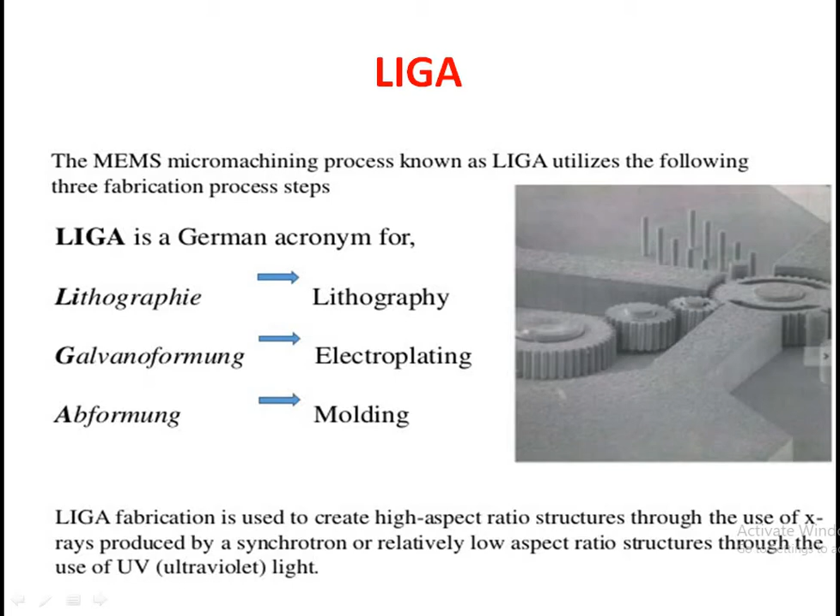So LIGA, once again, stands for the German acronym for lithography, galvanoforming, and abformung: lithography, electroplating, and molding. Now how does this LIGA process take place? These are the following steps for the LIGA process.

First of all, a very thick resist layer, up to hundreds of microns, of polymethyl methacrylate (PMMA) is deposited on the primary substrate. The substrate is the primary one on which this PMMA resist layer is deposited.

This PMMA layer is exposed to collimated X-rays, and then it is developed. Metal is electro-deposited on the primary substrate, and then the PMMA is removed or stripped out, resulting in a freestanding metal structure. Then plastic injection molding takes place.

This is how this process goes on: first, deposition of the PMMA resist layer on the primary substrate; then the PMMA is exposed to collimated X-rays and developed; then electroforming is done, where metal is electro-deposited onto the primary substrate; then the PMMA is removed, resulting in a freestanding metal structure; and finally, plastic injection molding takes place.

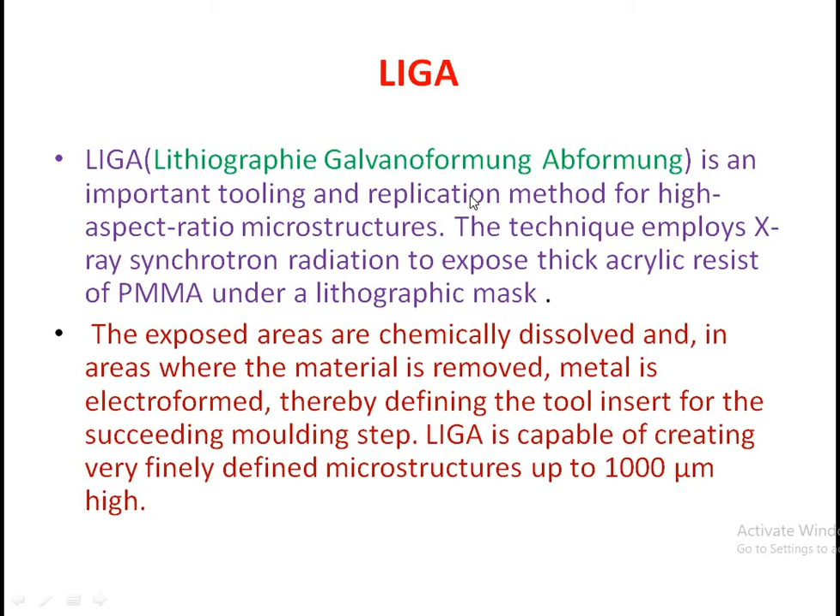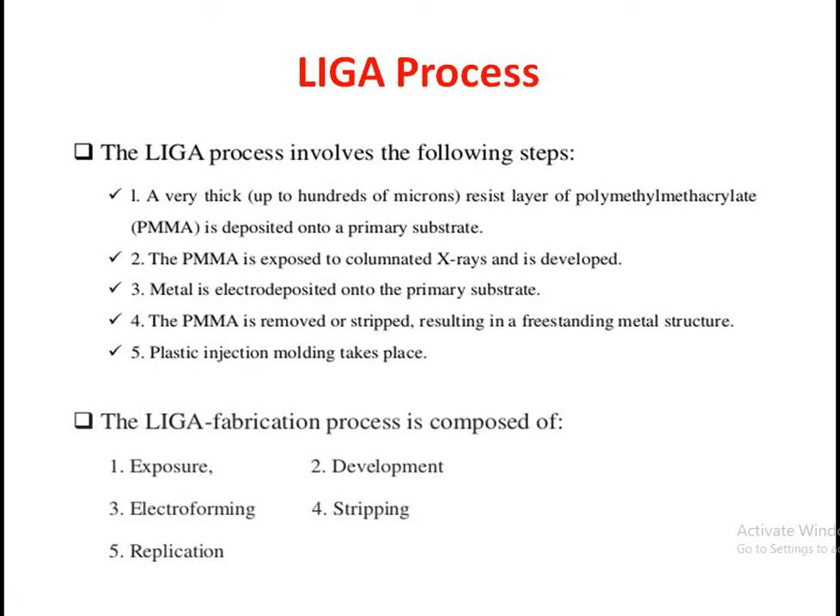This LIGA fabrication process is composed of the following steps: first is exposure, second is development, third is electroforming, fourth is stripping, and fifth is replication. That's why it is called an important tooling and replication method: exposure, development, electroforming, stripping and replication. This is how the LIGA fabrication process goes on.

Now in this first step, you can see the substrate on which PMMA is deposited. The thick photoresist, that is PMMA, of 300 to 500 microns, is coated on a substrate with an electrically conductive surface. Now the second step involves X-ray radiation.

X-ray lithography uses extended exposure from highly collimated X-radiation to penetrate thick resist with well-defined sidewalls. The X-rays have to penetrate through this thick layer of PMMA. This irradiation involves exposing a thick layer of resist to a high energy beam of X-rays from a synchrotron. The mask membrane is normally a low atomic number material such as diamond or beryllium, or thin membranes of a higher atomic number material such as silicon or silicon carbide.

That is the mask, which has either a low atomic number or a high atomic number. Low atomic number such as diamond or beryllium, or higher atomic number such as silicon or silicon carbide.

The first step is coating of the substrate with a thick layer of PMMA material, which is called photoresist. The second step is exposing that PMMA to X-ray lithography to penetrate through with well-defined sidewalls.

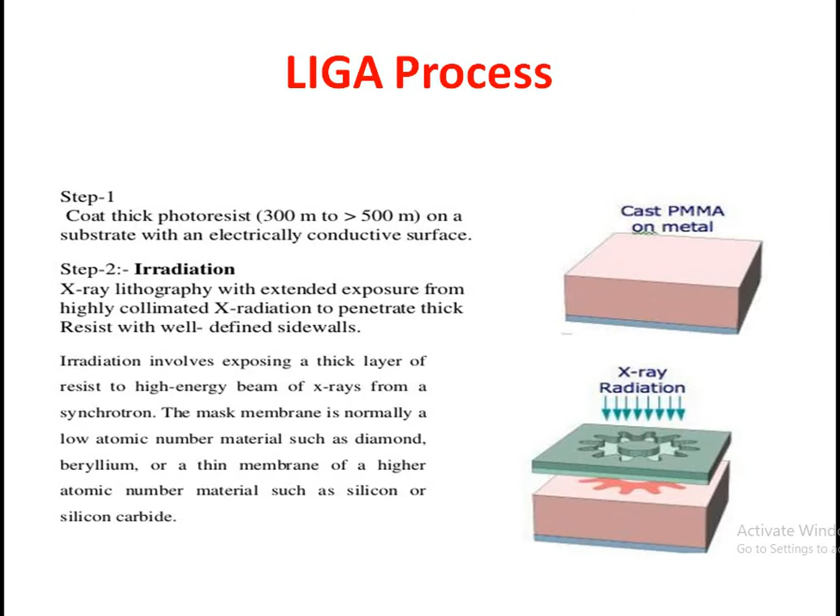The third step is the development. In this step, the pattern is etched into the resist substrate by the use of X-rays and the desired structure is formed. This is how development is done. Next is the electroforming.

Electroforming is same as electroplating, so metal is electroplated on the exposed conductive substrate surface. Electroforming means the plating is used to create an actual metal component. That's why the next step is electroplating.

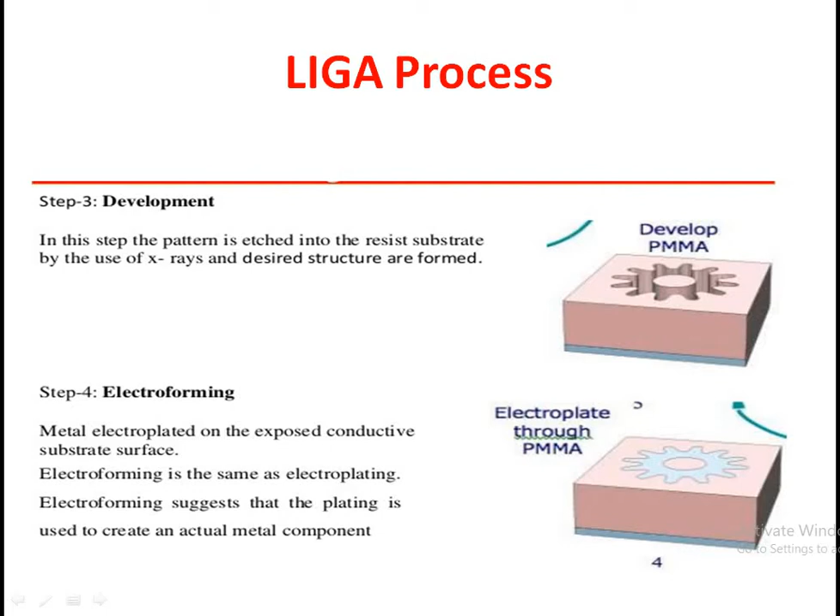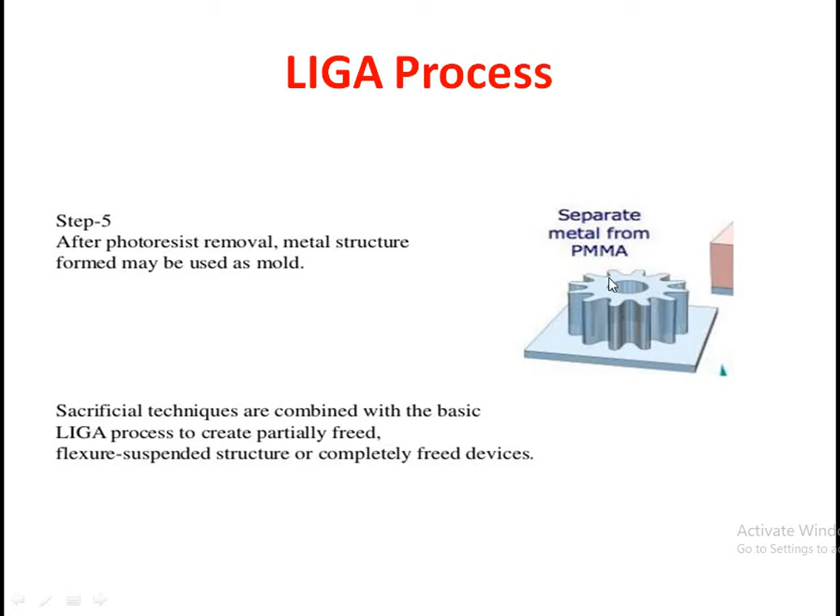The third one is development, meaning the formation of the desired structure, and electroforming is the plating used to create an actual metal component. The next step is, after photoresist removal, the metal structure formed may be used as a mold for making different jobs by separating the metal. This is how it is prepared using the LIGA process.

Now once again we will see this in tandem. First is the substrate, then the PMMA which is exposed to X-ray radiation. After that there is development, then electroplating, and this is separated from the PMMA. So this is the final product.

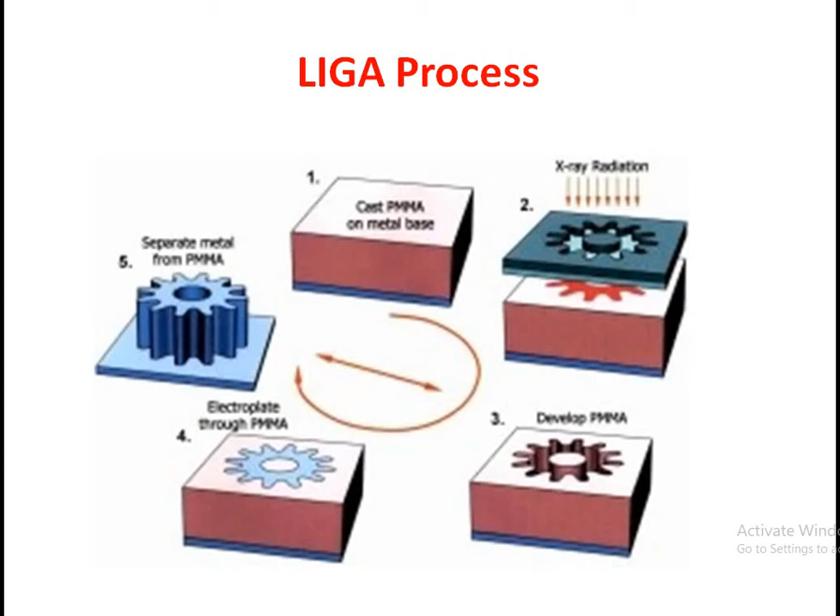Now, what are the components of the LIGA process? First, masks. Masks are composed of a transparent low atomic number carrier, a patterned high atomic number absorber, and a metallic ring for alignment and heat removal.

These carriers are fabricated from materials with high thermal conductivity to reduce the thermal gradient, for example vitreous carbon and graphite, silicon nitride, and titanium.

The mask can either be created by electron beam lithography, which you have already studied in rapid prototyping, or by a plated photomask. The third type is the direct photomask, which provides 80 micrometer thickness.

Substrate: as we have seen earlier, the starting material is a flat substrate, such as silicon wafer or a polished disc of beryllium, copper, titanium, and other materials. The substrate is electrically conductive.

And the photoresist: for fabrication of high aspect ratio structures, photoresist is a must. It forms a mold with vertical sidewalls and must be free from stress. The use of photoresist depends on the type of LIGA process used.

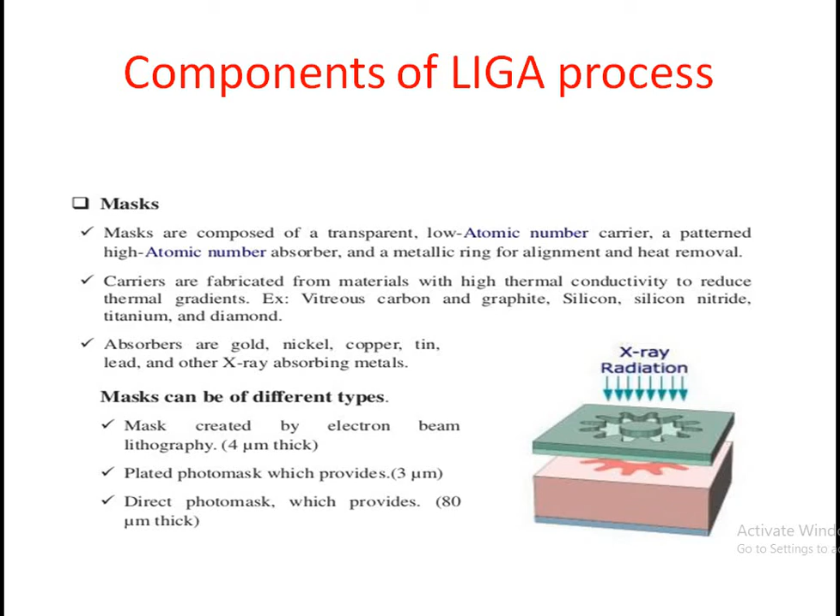First is the mask, which is transparent. Masks can be of different types, made either by electron beam, plated photomask, or direct photomask. Substrate is a flat substrate such as silicon wafer or other materials, and it should be electrically conductive. Then photoresist, for fabrication of high aspect ratio structures, is a must.

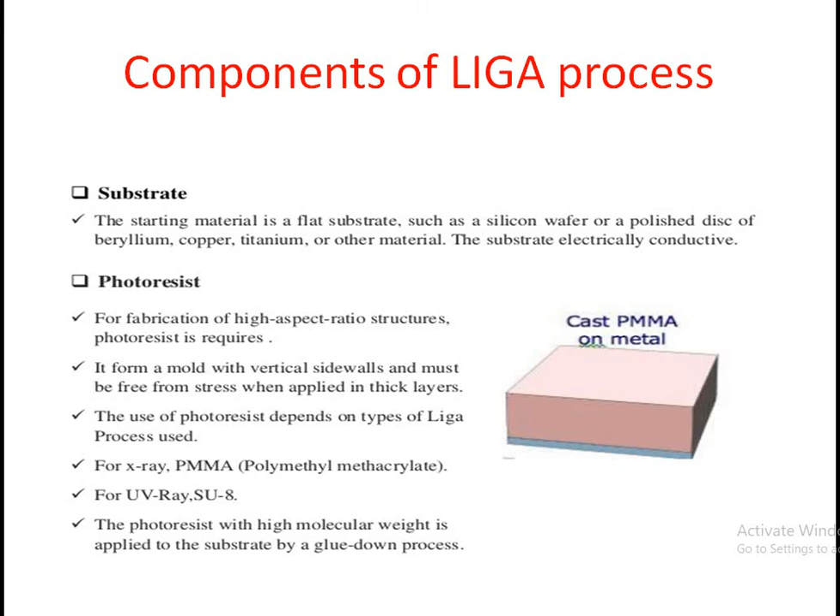For X-rays, you can go for PMMA. For UV, ultraviolet, you can go for SU8.

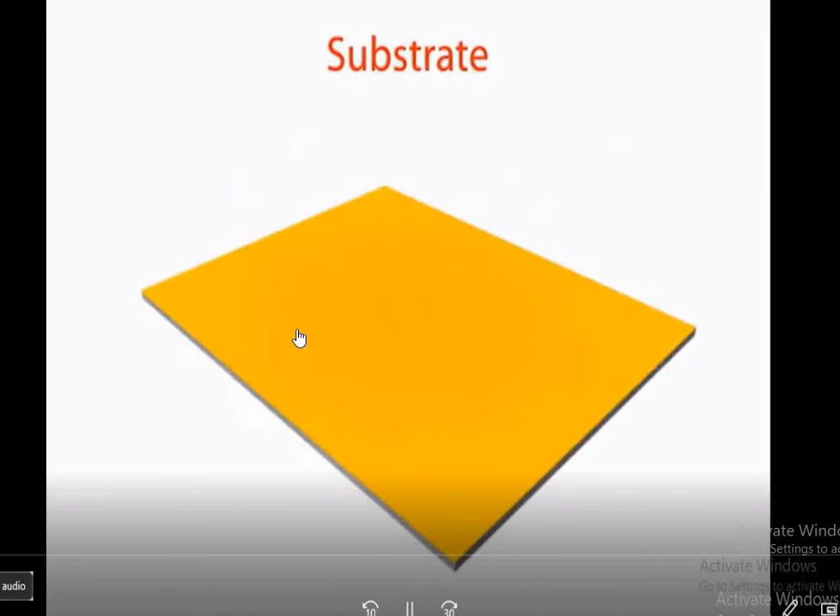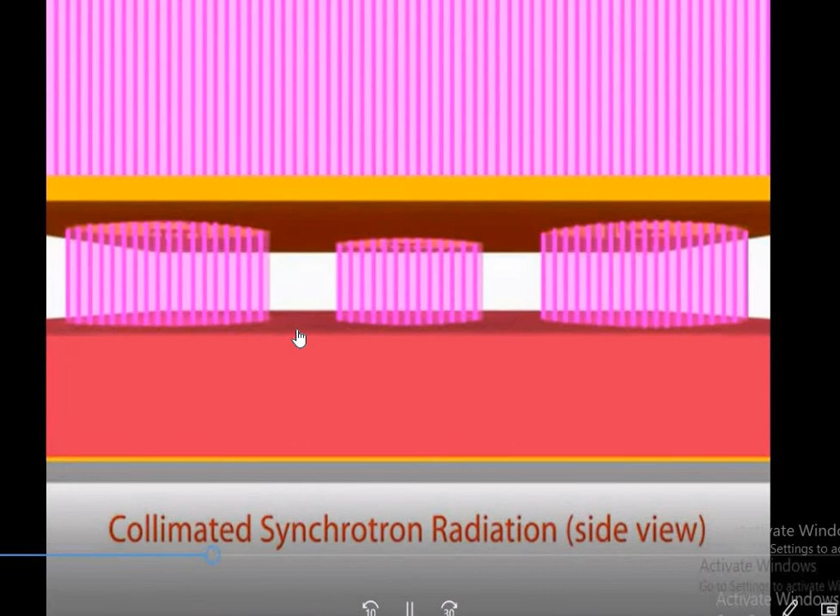See this LIGA micromachining process overview. First of all, there is a substrate on which there is the application of PMMA. Then there is a lithography mask which is used and exposed. After exposing, you can see the collimated synchrotron radiation.

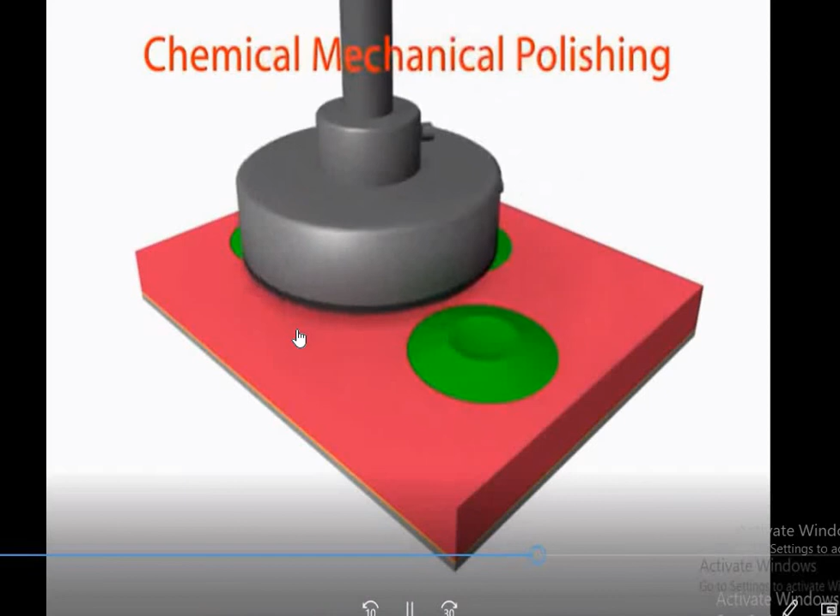After this there is a process of development, as you can see here. Then afterwards it is the electroforming process, and after that chemical mechanical polishing is done, as you are seeing here. After that there is removal of PMMA, which is called releasing of the PMMA.